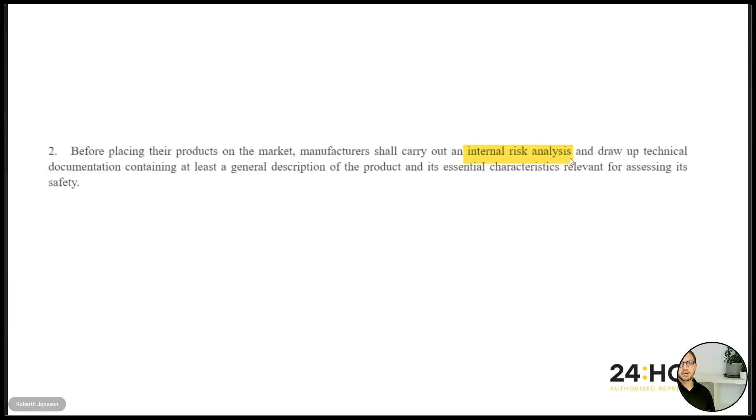Right, so moving on. We want to understand the new requirements on the technical file. First, a risk analysis is mentioned in the GPSR as a requirement. It says here: before placing products on the market, manufacturers shall carry out an internal risk analysis and draw up technical documentation and so on. Then it comes to the next part. Product description is mentioned to ensure that one can assess the safety of the product properly. The technical documentation shall contain at least a general description of the product and the essential characteristics relevant for assessing its safety.

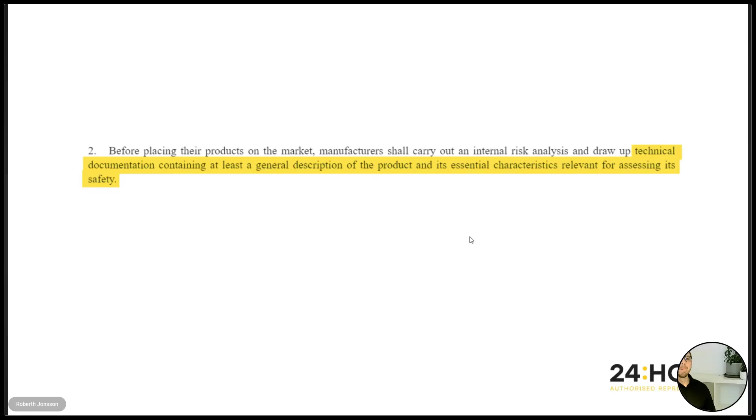This means that the description may differ between products depending on the complexity. For some products, just a simple picture would be sufficient. For some products with complex functionality, you need to add also descriptions of the software or the electronics, just to make sure that everything is clear.

So why does the GPSR say risk analysis instead of risk assessment? This is playing with the words here, but bear with me and I'll explain. Basically, it is the same thing, right? Again, the FAQ mentioned says that the manufacturer must document their risk assessment. It doesn't say the risk analysis. However, there are some minor differences here.

A risk assessment, according to the standard EN 12100:2010, which is a standard for machinery but describes this quite well, is a combination of risk analysis and risk evaluation. And if a risk is not acceptable, there's a need for risk reduction, so reducing or removing the risk. So risk analysis, risk evaluation, and risk reduction.

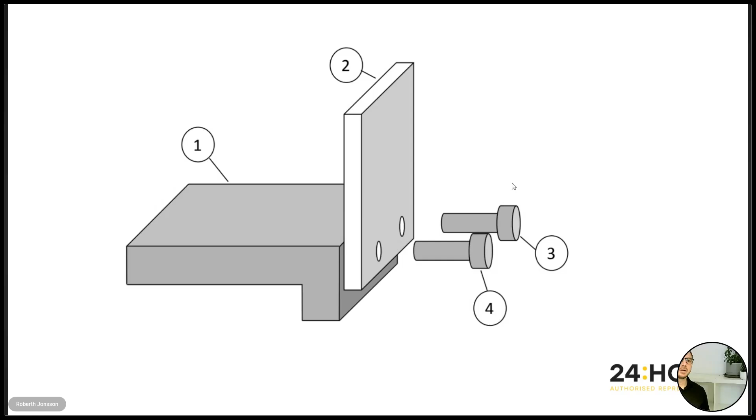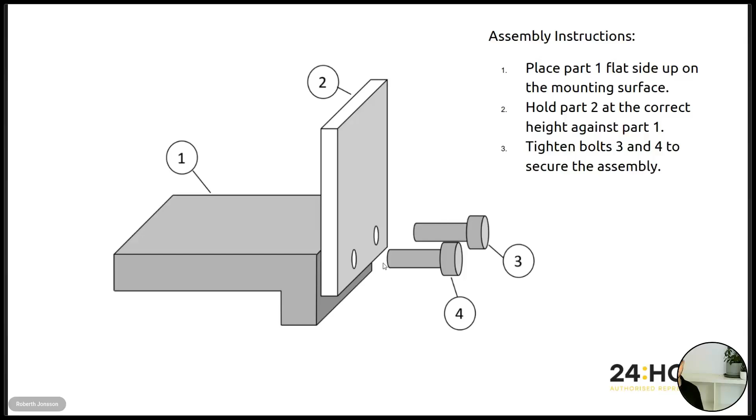Here we have a situation where you have two different metal plates that are supposed to be bolted together. There's an assembly instruction here. You place part 1 on the mounting surface, hold this part at the correct height, and then tighten the bolts to secure the assembly. Quite simple instructions, but as part of the risk assessment, we need to assess if there are any risks with this. And let's say that these two both weigh 20 kilos. Are there any dangers or hazardous situations here?

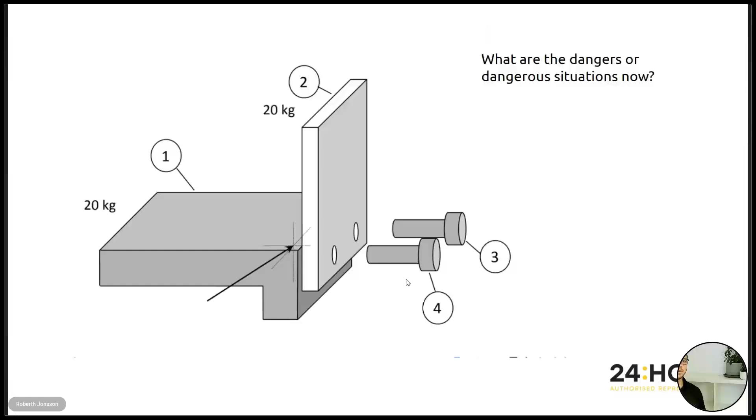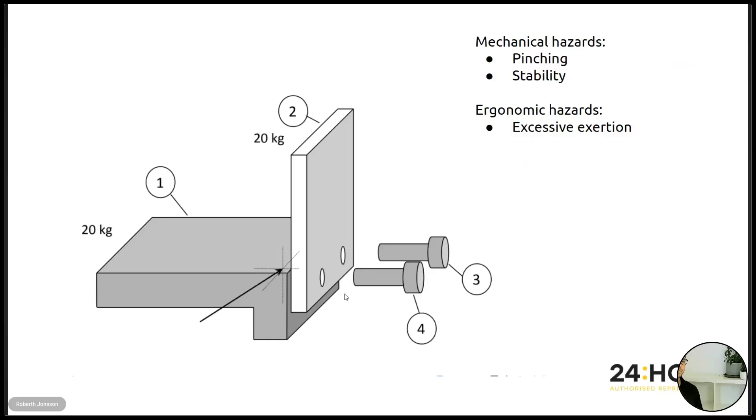And yes, there definitely is, because a 20 kilo plate could easily hurt fingers, pinching. It could topple over. You could get ergonomic hazards such as excessive exertion on your back, so you can get damaged in that way. So these are risks. So you could basically do something like this: you would add a warning, you would enter cautionary details in your instructions.

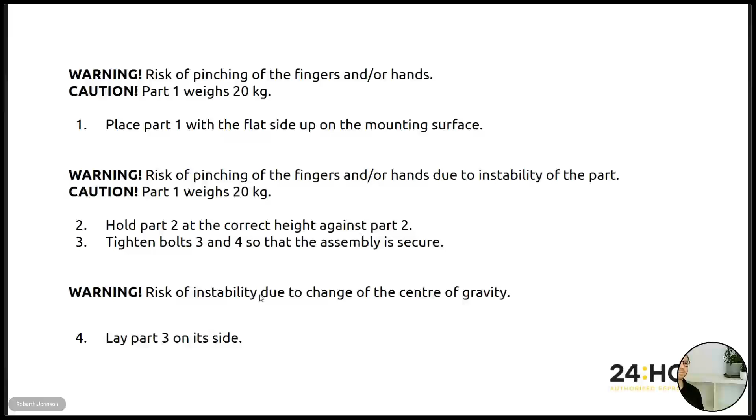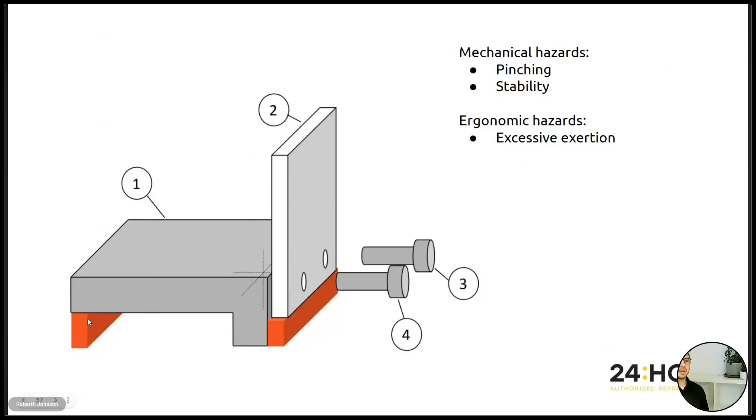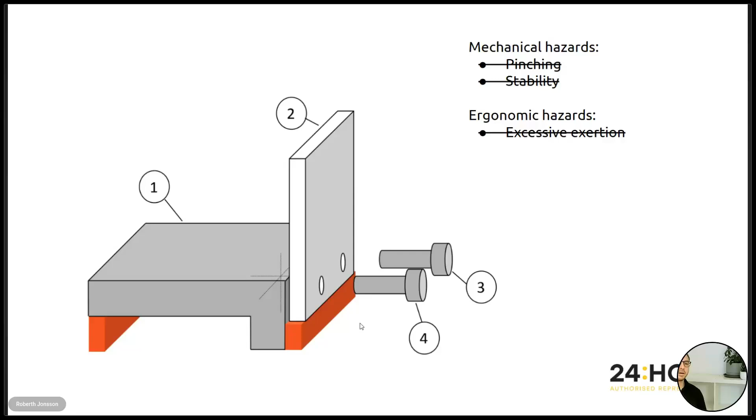But basically, what we want to do is to remove the hazards altogether. And simply adding these two red parts here would basically remove the hazards. So you would no longer have a risk of pinching, you would no longer have a risk of stability issues, you would no longer have the risk of excessive exertion when assembling these components. So basically it's much easier to do this. And of course the manual would also be much simpler without all the warnings that we would need to have as well.

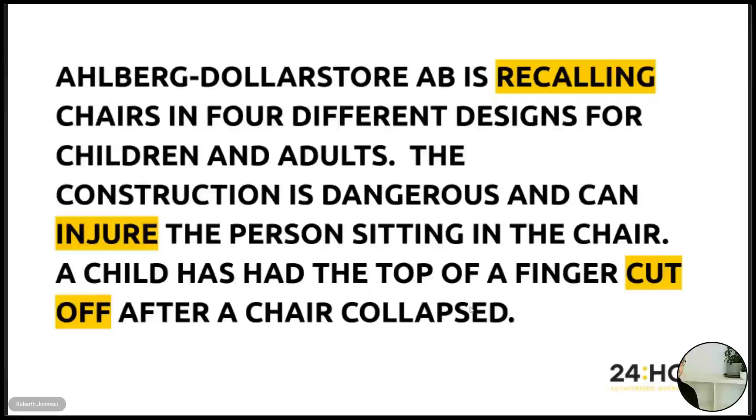So Ahlberg-Dollarstore AB is recalling chairs in 4 different designs for children and adults. The construction is dangerous and can injure the person sitting in the chair. A child has had the tip of a finger cut off after a chair has collapsed. The chair lacks a safety lock, which means that the wooden rod that regulates the seat height can jump off the recess in the frame. Then the chair folds up accidentally. The person sitting in the chair risks having their fingers crushed or pinched between the wooden parts of the chair.

If a risk assessment had been conducted, so basically risk analysis, risk identification, risk reduction, all that, if that had been conducted properly, the accident with the cut-off finger would have been avoided. So we will soon look into the risk assessment method that we teach, and basically we came up with this risk assessment method based on 2 different official documents.

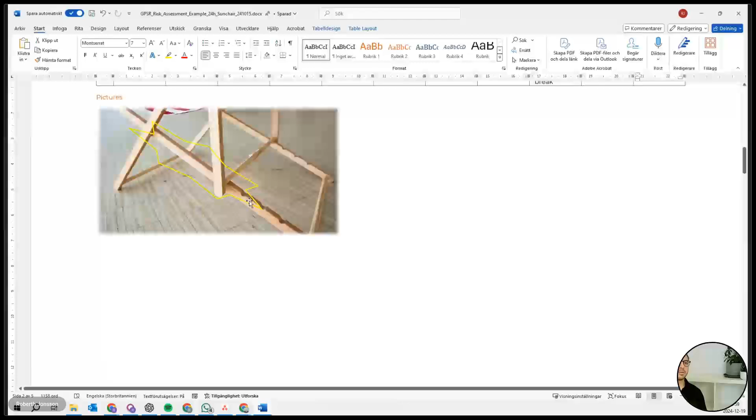Then in usage, the fold lock is not solid enough and may cause the chair to collapse. In this case, for children and adults. Again, finger entrapment. Existing measures: we do have a fold lock, but it's too weak. And then the severity of this would be high, probability medium, and this would be a high risk. Then we will both increase the space and improve the locking mechanism. And finally, if we think that with all these actions we consider it acceptable, then we say, yes, this is acceptable for us. It may not be incorporated into the product yet, but in theory, this would be what we say. So it's acceptable. Yeah, so here we have a picture as well of the product and the risk hazard area.

Here we do have some information on how to use the template, and of course the actual determination of the level of risk. So we have the severity, we have the probability, and these are our general guidelines. So if there's a low risk, it's definitely acceptable. If it's a medium risk, you may need monitoring or any control or design changes. And if there's a high risk, then we would consider it to be unacceptable and you would need to do immediate actions. Yeah, and then in the end here we have a method description of how we actually came up with this method. So that's that.